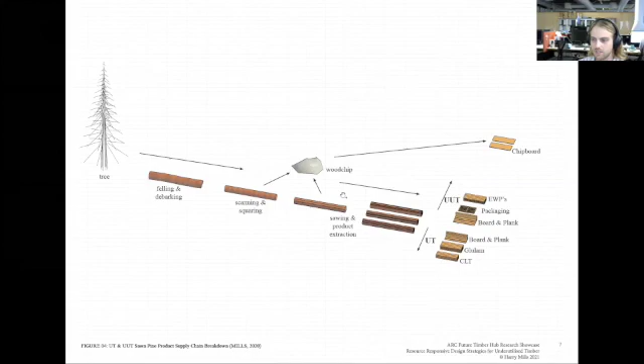This is another diagram of the different markets and streams to which the underutilised or utilised timber can go. The red is the utilised and the blue is the underutilised. These are areas of wood which I would classify as marginalised, or where there's opportunity for value adding, and it occurs right across the supply chain. For the purpose of this presentation, we're focusing on the board and plank products.

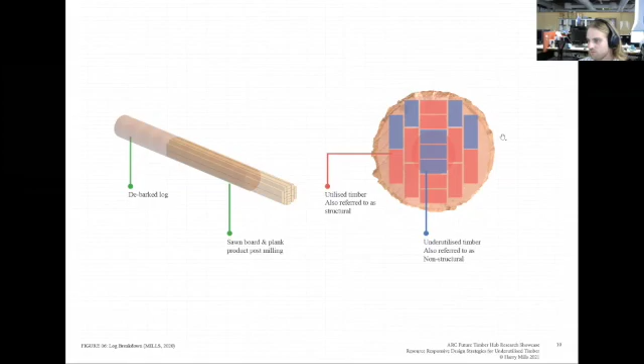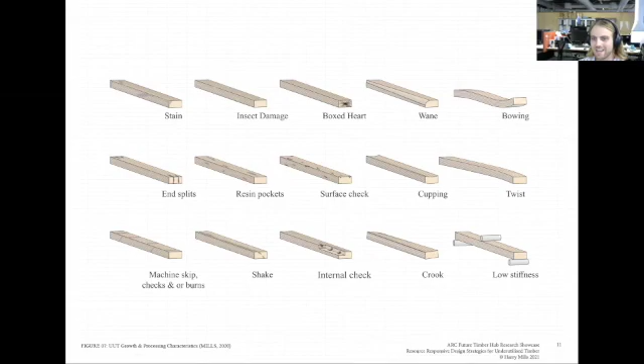Structural and visual characteristics like knots, wane, distortion, colouration, and low and fluctuating density properties are just a few that can be found in UUT, or underutilised timber. When these are found together, the timber is classed low in grade and has low consumer acceptance, which means it's low in value. Presently, we can define underutilised timber by its failing grade, low quality in terms of structural and visual characteristics, low in financial value, however high in volume.

Issues such as designer awareness, consumer acceptance, legislation and code compliance are challenges that must be addressed for UUT products or the UUT resource to gain market uptake. So who's responsible for dealing with this volume of wood? Underutilised wood is not a new concept. Indeed, low grade and low quality wood has been around since the earliest days of timber felling.

In the present market, it can be argued that the forestry, milling and manufacturing area is aware. However, outside of this area, among designers, builders or end users, there's very little awareness of this volume of resource. This research is coming from a designer background, aiming to initiate awareness, interest, and ultimately some responsibility with design practitioners.

I'll present now a preliminary responsive tool, which looks to address some of these aforementioned problems. This is a Rhino Grasshopper tool that consists of two components. This is a tool for post and beam building typologies, which has a structural analyzer for slab, beam and column design for CLT and glulam structures, and a resource consumption visualizer, which provides big picture understanding to how much wood is being consumed.

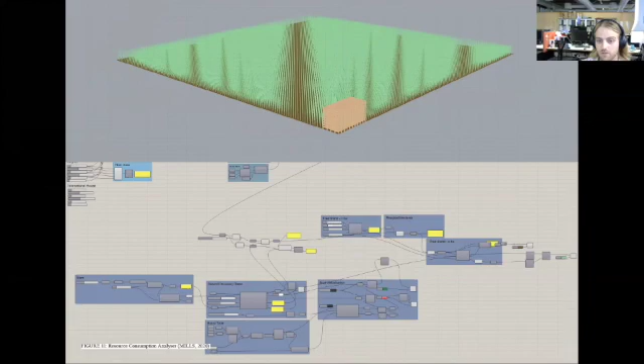I'll bring you back to the previous slides on underutilized timber to really pinpoint the problem here. For every log that gets sawn for board and plank product, up to 40% of it can be classified as underutilized timber. There's very little market for it. However, critically, there is a significant volume.

With little expansion of softwood plantations for some time, coupled with current demand for timber increasing for its sustainability credentials, the mass timber push, and a local market which is becoming more reliant on international supply for timber products, there are serious opportunities to value add underutilized timber for built environment purposes.

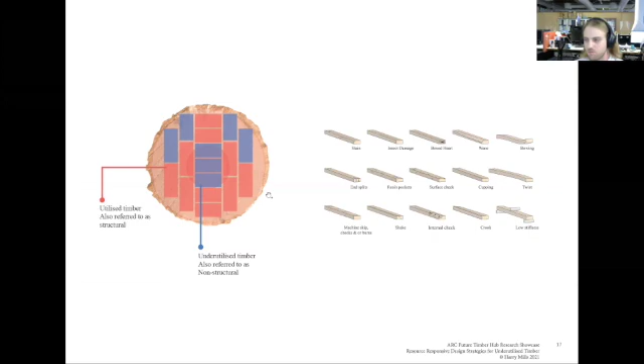I'll jump in and give you a fly through of the tool. So the design toolboxes are treated discretely. The slab design is based on a local manufacturer's guidebook as to current standards and sizes for typical slabs, and given for the proposed loads, serviceability, structural dynamics, and strength under vertical loads, and simplified natural frequency checks.

Beam design is similar to slab, sized for strength limit case, dead and live loads, and serviceability deflection limits. As with the beam, column design is sized for strength limit in case of dead and live loads, although omitting serviceability deflection limits given the actual deflection over multiple stories being minor. Some of the assumptions are neglecting transverse loads, non-critical, not significant to the total volume of building.

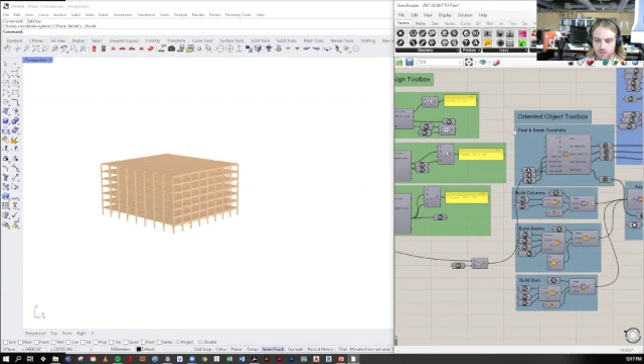We can play around with the sizes, the different span, beam length, and so forth. To verify this tool, we're really quite fortunate in that in Australia we have two recent building examples in International House and King Street that we could use to verify the accuracy of this, which was really quite successful.

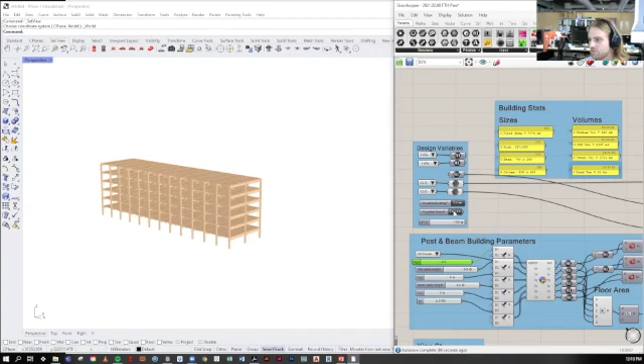Now, this tool gives you an overview of how much volume of wood and the sizes are being used. So if we look at International House with the material which was used, with no underutilized timber at all being used in the project. However, if we're able to implement and add underutilized timber to some engineered wood products through CLT or glulam, and if we're able to drop this to like a 40% uptake, we can drop 7 hectares of forest immediately.

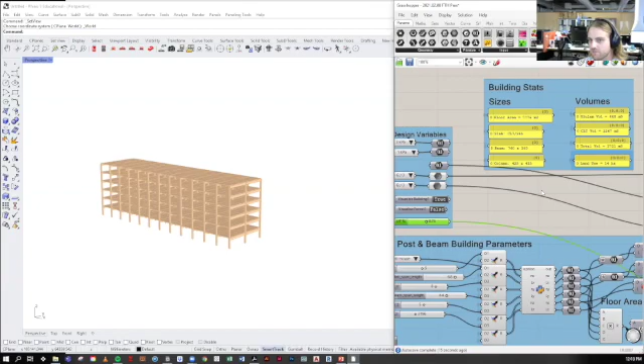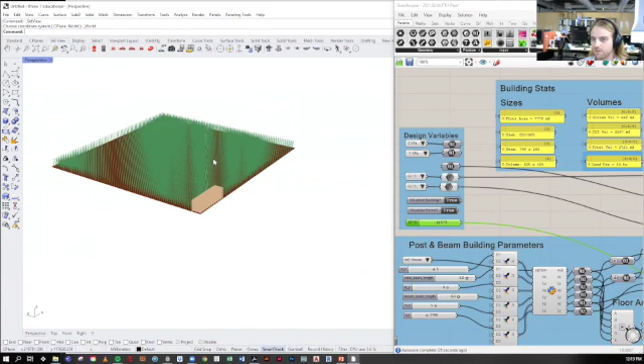And so just by implementing a little bit of underutilized timber or looking to specify this further, we can really understand how much volume of wood we can reduce. This we can visualize further with the forest and the trees. Now, this would be quite a handy tool when you're trying to convince clients to specify a certain product, and the benefits for that.

And the underutilized timber in terms of how much we can actually use, even just if we could get it to 20% uptake, we can really drop the amount of land use and how many trees we're ultimately using. So underutilized timber has the potential to be incorporated into different products, and providing designers with sustainable tools like this really gives options for them to specify alternative and more responsible timber products.

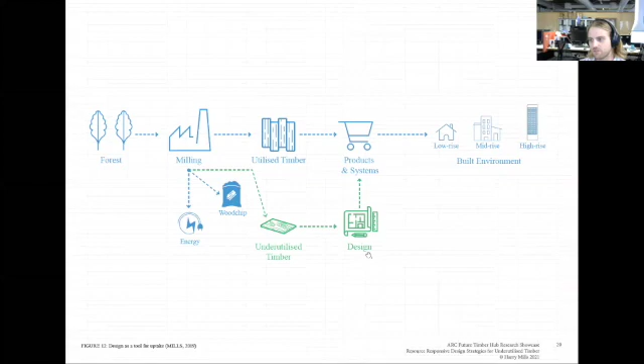This is where we're coming from as a design, trying to implement new products and systems, and ultimately trying to generate new products and build prototypes. Some of the other research that I've been involved in through the PhD has conducted interviews extensively across the building supply chain, and one of the key takeaways from that was that we need built prototypes to see what this resource would look like.

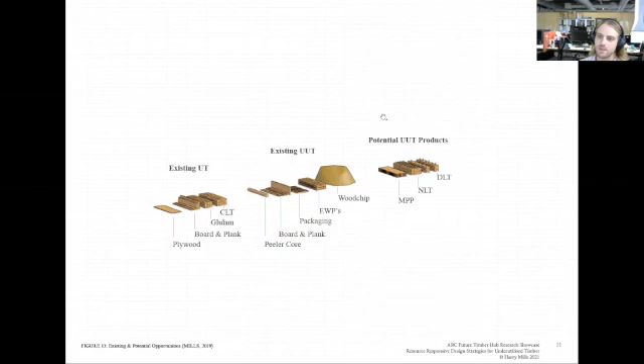Kim's going to give you a good overview of some of those products and systems, and I'm going to run through some of the tools and ideas that Joe's been generating for the project now.

So a utility grade processing toolbox has been developed to import and utilize quite a vast amount of data we get from the manufacturer, so board data designed for product and system design. Manufacturing board processing data is extremely rich, including board images, stiffness and grading, and defect type and location data. It is about 3.5 megabytes per board, with two boards produced per second.

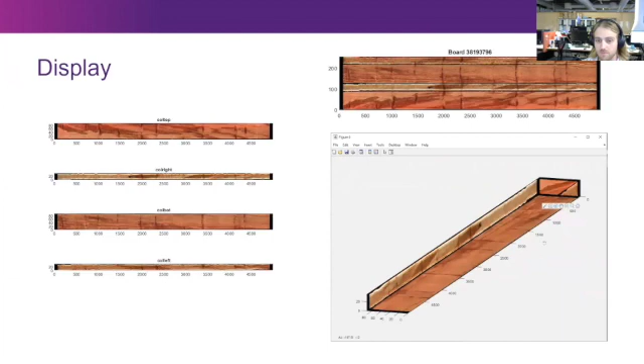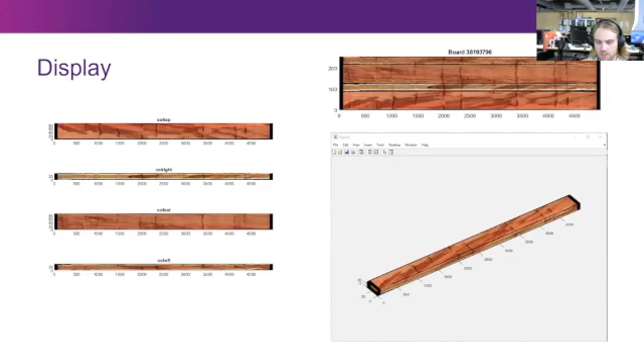We are the only building design research group in the world with direct access to commercial board and production data, which has allowed us to pursue some really interesting investigations, as you can see on screen here. But to enable that, Joe's been able to build a toolbox to import the XML manufactured data into a MATLAB resource database, which can store inventory information for any boards they're happy to use. We can inspect boards in full color to look for certain visual features.

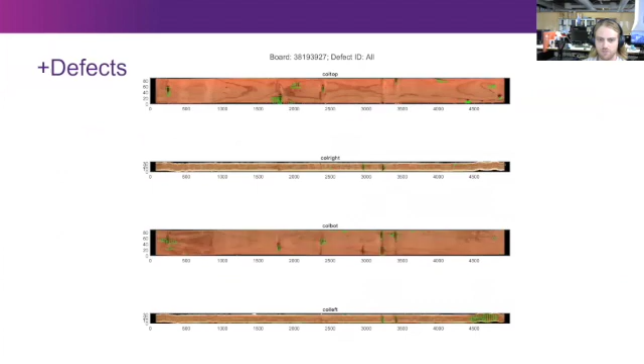The main features of interest are defects, so some of the characteristics which I was highlighting before of underutilized timber, and they're already located in the data packet that we receive from the manufacturer. So you're able to access the data directly, for example, to find clear wood regions or best face or best length, which contains the fewest defects of a particular type.

Our primary interest, though, is the stiffness data, which is stored as an overall board average modulus of elasticity, or MOE, but also as continuous MOE values sampled along most of the board length in the mechanical grading process. This data is what Joe's been accessing for the structural product and system investigations, and this will be further elaborated on by Kim with some of the examples he's going to show.

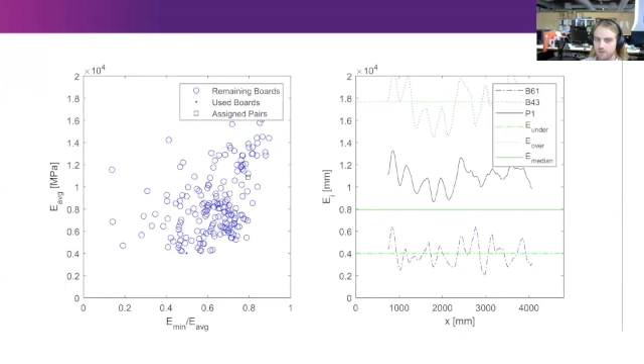What we've found is that for board laminations, quad lamination is sufficient to completely homogenize a set of underutilized timber boards, effectively raising the average MOE to 8,000 MPa for the entire feedstock, as well as substantially eliminating localized weak regions of the board.

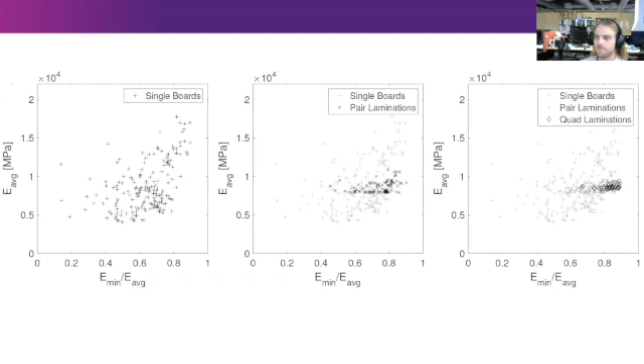One of the last things I'll present for Joe is a work in progress. It's an extension and a bit more beefed up version of the tool that I presented earlier. Joe's looking to integrate some of the tools and concepts of that earlier one for real-time connection design tools, essentially developing a Python library of parametric models for element and connection sizing, as well as design heuristic tools for direct section lookup. They are open source and are intended to both help with initial concept sizing, as well as provide some building blocks towards complete algorithmic part generation for digital fabrication.

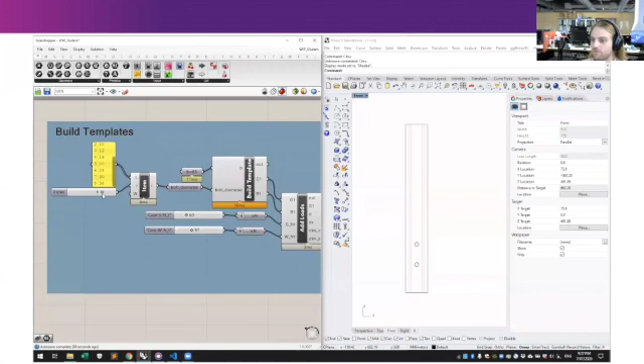This is a bit of a work in progress, as I mentioned, but as a brief, simple illustration of what we're driving towards, here is a glulam member with two tensile load cases, element cross section and connection sizing, generated in real time based on governing load and preferred connection bolt size. The colored outlines are the load case sizes; the black outline is the overall size from the available section sizes.

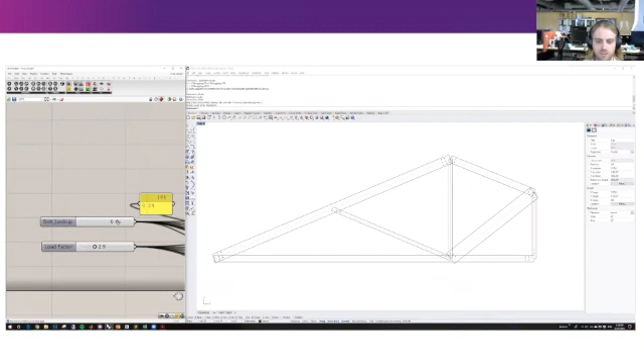Here is a mock-up of the end goal, but these tools are fast enough that we can create structures in which every element and connection are self-sizing in real time. This truss has 7 elements and corresponding connections. And as we apply a load factor to scale the element loads, or as we change the bolt size preference, you can see the truss attempting to size itself or remove elements when there are no sizes available for the given load.

So on that note, I think that's a good overview of some of the digital strategies that Joe's been working on, and a good understanding of the underutilized timber, or out of grade non-structural wood, which we have available to us here. So I'm going to hand over to Kim, who is in the architectural collab, and he's going to run you through some of the work he's been up to.

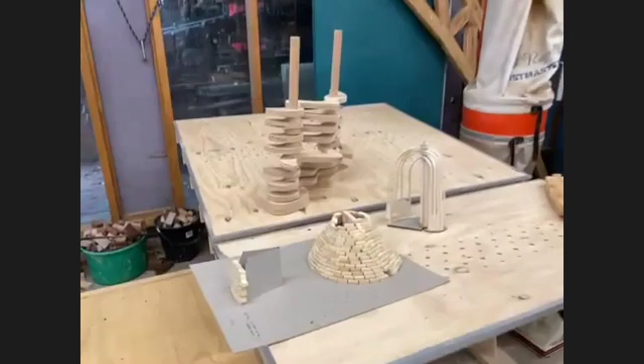This space is what we call the collaborative laboratory, or the collab for short. And it really is a space where our students in the School of Architecture, but also between the School of Architecture and the School of Civil Engineering, can collaborate on projects. So the types of things that they might make in here would be little models, as you see in every architecture school, but then they also get to build full-scale prototypes.

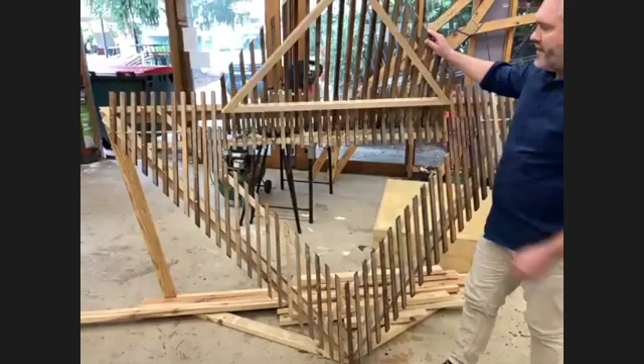So this is a recent project where some students in the master's course were looking at building a screen for a tower with a little operable window. So they learn how to actually fabricate these at 1:1 and develop their design accordingly. So we really see a strength to our teaching here, being able to offer students the opportunity to get involved in hands-on making, and that leads them into potential research higher degrees.

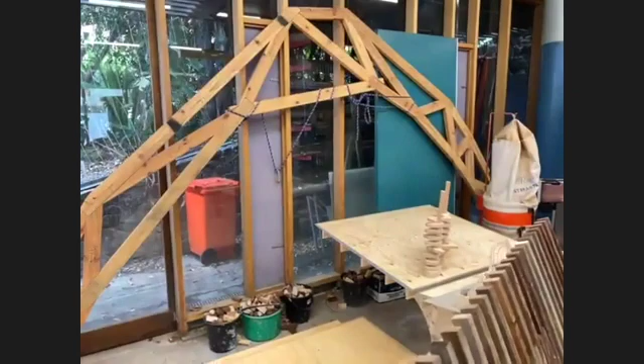What I'm going to talk about today, you'll see this kind of weird shaped truss behind me here. This is one of the first of what we call inventory constrained design projects that we worked on about 2 years ago. It's quite a funny shaped truss, but it's deliberately so. And I'll explain that when we get to it.

One of the key things that we're looking at when we look at underutilized timber is what you might be able to do with the timber if you were to take out those defects. So if we were to start off with a piece of utility grade stud and we cut the defects out, of course you end up with all of these odd shaped pieces, and that's really not of much value to people.

However, with our computational design processes and our analysis tools that we're using in MATLAB, we are able to automate the design of custom shaped structural members and structural elements such as this truss, which look to find a home for each short length of timber that results from a piece of utility grade once you cut the defects out.

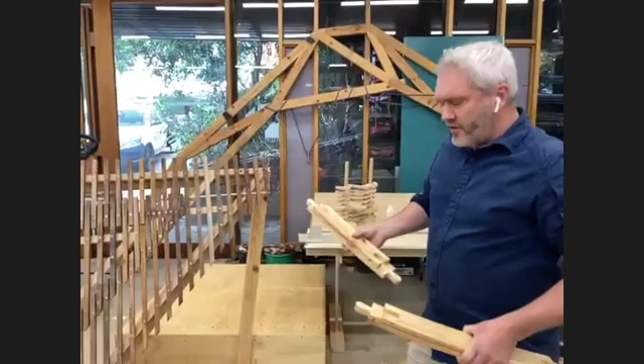So one of the things that we look at is what you do with small pieces of timber. You can make specific shapes. You can look at how we might be able to join these pieces together without the need for a mechanical fixing potentially. We can do that through our computational design and our digital fabrication.

So to summarize it, we're interested in what we can do with undervalued timber that comes from a shortening of a member into small pieces that are dimensionally undervalued. We're also interested in manufacturing byproducts such as peeler core. I'll talk about this in my presentation as well, but we have quite an extensive range of projects where we look at ways in which we can use short length peeler core and join it in novel ways.

We are also interested in offcuts from, say, a CLT manufacturing process. So here we have a column which is laminated circumferentially, and it's made out of what we would envisage being an offcut from a billet in a CLT manufacturing process.

We're able to use the technology from both the computational design tools and also our digital fabrication to look at how we can yield greater value out of using what would otherwise be seen as pieces of resource that have very little value.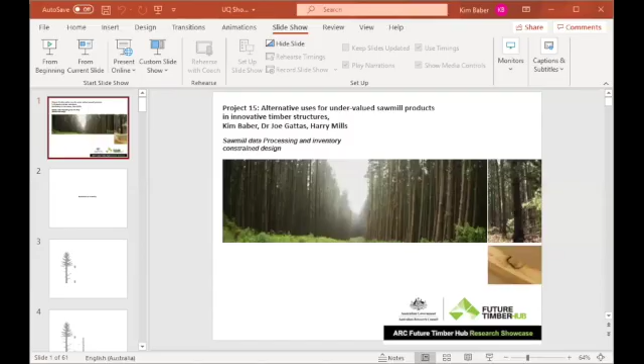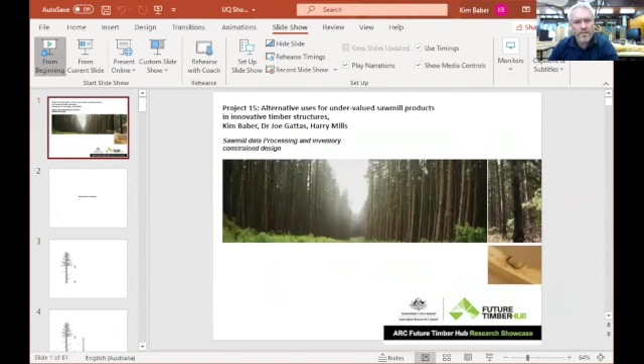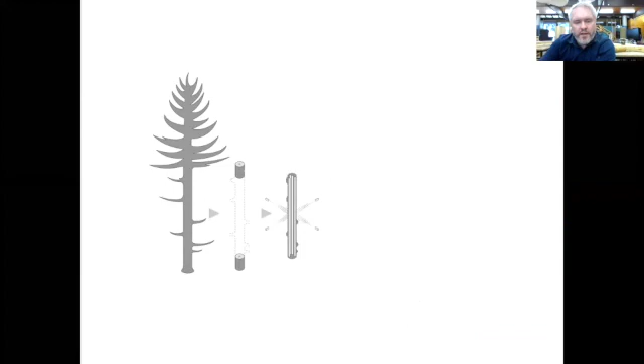So as Harry introduced, one of the core parts of this project is to look at how we can both generate an inventory of undervalued timber and then what we can do with that inventory. So if we just re-summarize Harry's slide on what happens to the timber from the stem, obviously after milling we have usable boards which would be clear and reach the required MOE over their length. But those that have defects on the bottom there are often used for other applications, and in some cases that turns into chip.

However, what we're interested in is what we might be able to do if we were to work with these short lengths. And so once you do cut those defects out, we have, in effect, an inventory of unique lengths of structural grade timber.

So we do have all of this data at hand, as Harry described, and we're able to analyze that in a very fast and sophisticated manner that will generate this digital inventory of short lengths. On the right-hand side, you can see here what we might yield from a typical pack of utility grade timber in terms of the usable lengths that would actually achieve the required structural MOE once you cut out the defective lengths from the stud.

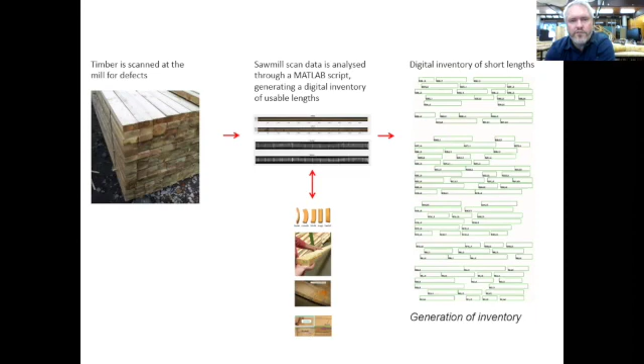So as you can see in this example right behind me here, one of the first projects that we looked at, we're looking for structural applications where you are already working with short lengths of material. So trusses are a good example, and curved trusses even more so, where by definition, every element within that structure is already being cut to a shorter size than it's likely arriving in the workshop as. So here's an example of a curved truss where we looked at our inventory.

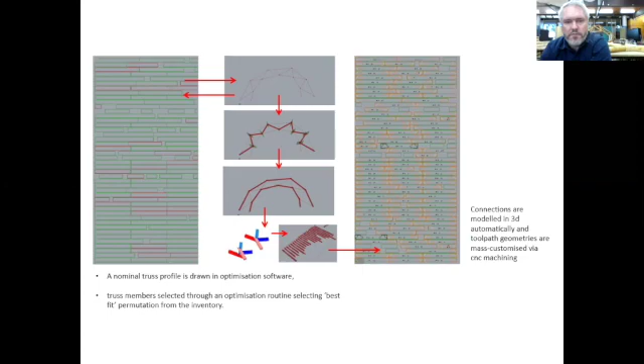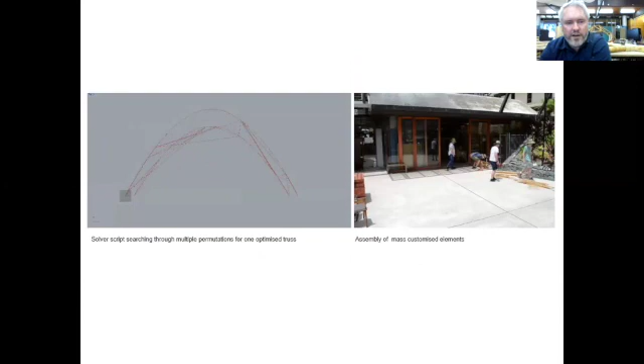We use what we call a parts assignment heuristic tool, which takes all of the parts available in the inventory and it assigns them to a location in the structure based on a set of rules that we can make up, a heuristic that allows us to program in desirable deviations from the target geometry or certain lengths. Here you can see it running on the left-hand side. It's rapidly sorting through all of the combinations that might be available.

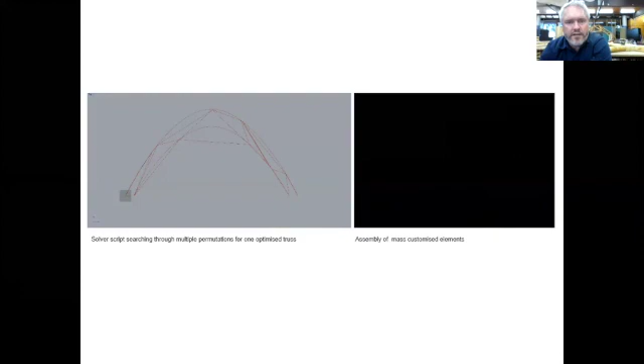And so this was a project that we ran 2 years ago where we looked at developing a uniquely shaped truss, but again, each element within that truss is machined digitally through our CNC router, and we're able to convert the process of inventory constrained design into digital fabrication.

Another example which took that process and really applied it at a more sophisticated computational level was a project that we entered into the IASS, the International Association of Shell and Spatial Structures, as part of a competition where we worked with Professor Jane Burry and Chun-Wei Chen from the Swinburne University of Technology. And this project was looking at curved arches. So again, a structural type that inherently requires small lengths in order to be constructed.

So we were combining two form finding methods. We were actually looking at a funicular structure, and some of you may be aware of the funicular geometry that Antoni Gaudí worked with in masonry over 100 years ago. This project was looking at how we might look at a combined optimization tool where we used both a funicular modeling tool combined with an inventory constrained computational model.

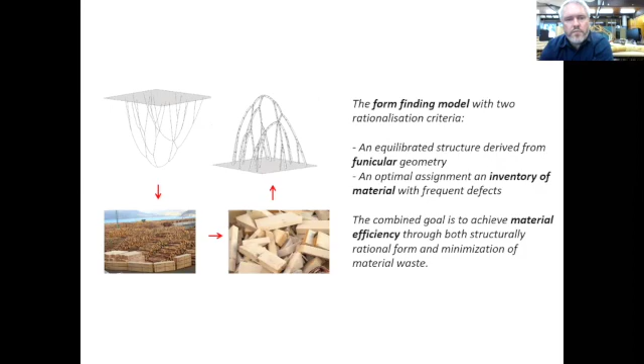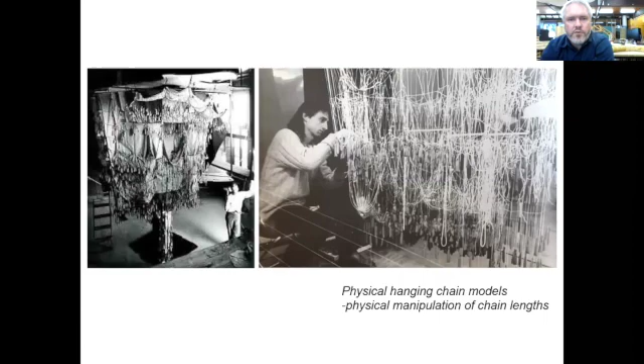Here's the types of models that Gaudí worked with over 100 years ago. And in these models, he actually physically suspended lengths of string and chain in order to derive the optimal structural geometry for, in this case, a masonry arch. So as I said before, when we build the parts assignment heuristic, we feed in constraints, which in effect constrain which parts of the inventory we're able to utilize in the structure.

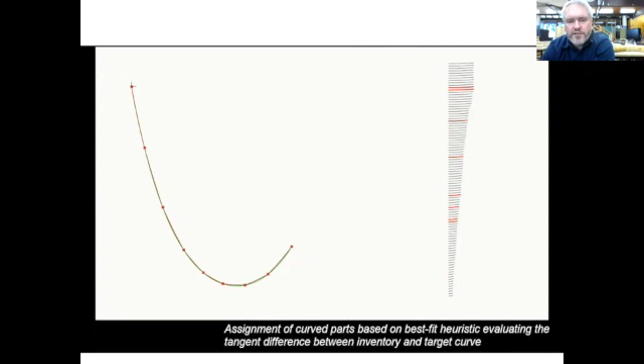So in this case here, we have a given form, a given curvature, and we are able to apply, for example, the amount of curvature that a certain given length of timber may yield once we define the amount of material taken out of it. So here you can see a little video showing when we change the curvature in a given arch. On the right-hand side, you can see our inventory of unique lengths, and it goes through and sorts out in real time which parts would be assigned to that arch and in which order. And so that's quite a sophisticated, what we call a parts assignment tool.

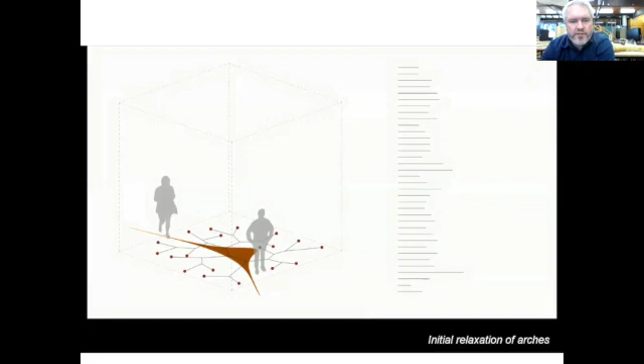And we've run this in combination with a digital funicular form finding tool. And so this is using Grasshopper in combination with a plugin called Kangaroo that allows us to hang chains in a virtual environment. It also allows us to, in effect, tweak the lengths of those chains or strings, like you can see on the right, in a way that's actually a virtual version of Gaudí's hanging chain model.

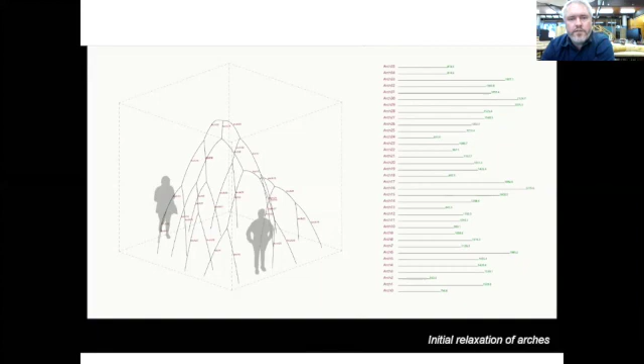So we're able to have both a form finding model that has its own optimization set of rules, which is about funicular geometry. And we combine that with the inventory constraint from our inventory of short lengths. So here you can see after we've generated that initial hanging chain, we can then run our parts assignment heuristic to map onto that geometry where each part of our inventory can best fit. However, we can give it a certain amount of tolerance, and we can say, okay, let's try to get every part within 5% or 7% of its target geometry.

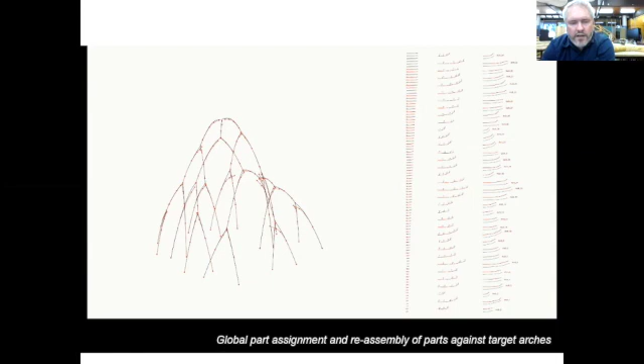And it tells us how close we can get after sifting through thousands of variants. But the kind of neat thing with this project was that once we'd arrived at that, let's call it a best fit, it's not necessarily the perfect fit, but it would be the best fit with that given inventory. We can then go back to our funicular form finding process, and we actually relax that model in order to meet the target that has been given to us by our inventory.

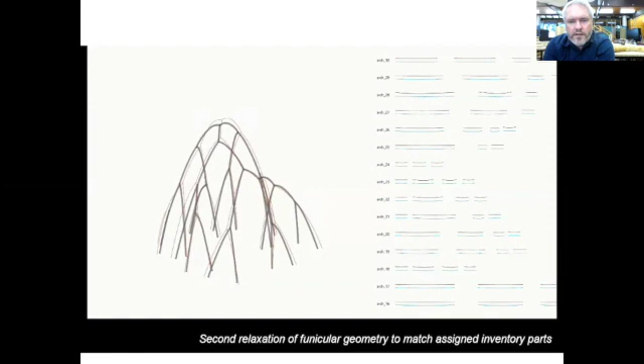So in effect, it's telling us how much to shorten those little pieces of string in the model and therefore meet the constraints of the inventory. But at the same time, during the re-relaxation of that model, it's also deriving a new, slightly different funicular geometry. So we're able to optimize both the funicular geometry as well as the parts assignment of the unique inventory of short lengths of timber.

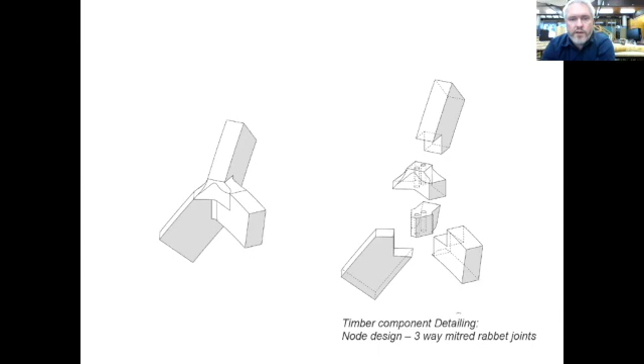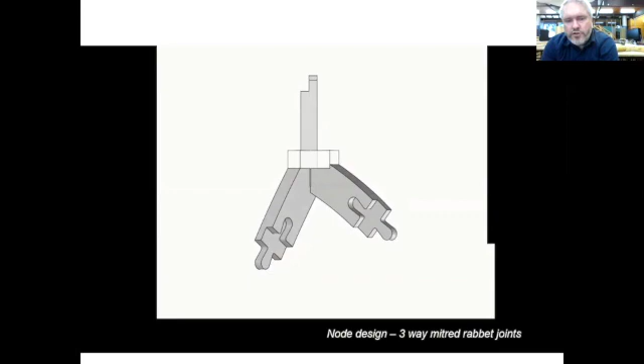Now, our challenge was also to use utility grade for the structure in its entirety. Now, this structure was very interesting in the sense that it did involve these three-way joints, these branch joints. And by definition, each one of these joints was unique in the way in which each member intersected each other in a three-way geometry. So one of our challenges was to look at how we might be able to construct this complicated three-way node out of simply two pieces of, in this case, 90 by 45 utility grade stud.

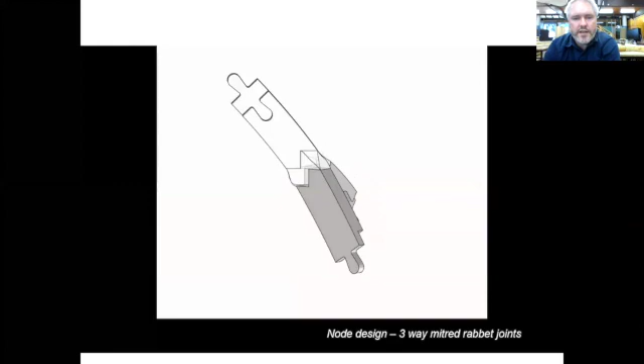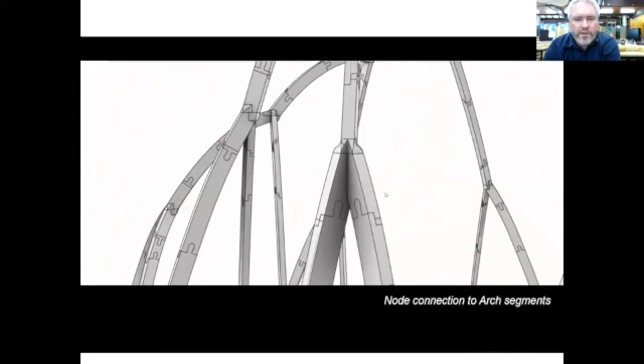And so you can see here that it's actually made out of just two blocks, which are paired top to bottom. And we create this filleting between the pieces that allows us to transition from one geometry to the next. So again, you can see that this computational processing of the transition of each joint could be done through a parametric model. And obviously, each one of these is unique, as you can see. It finds the intersection paths of each of those pieces of timber and generates the geometry of each one of those blocks uniquely.

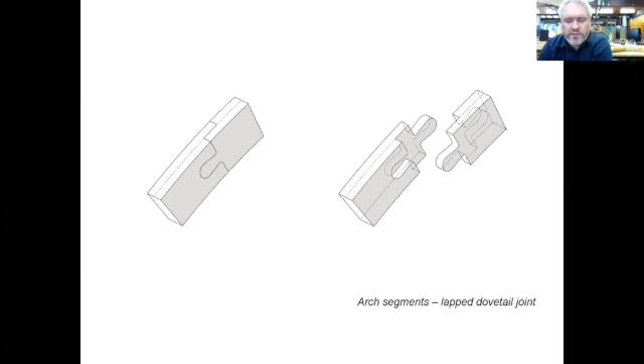A simple lapped dovetail joint was what we used to join each one of the members inside the arch itself. And again, if you think about structures that are necessarily using lots of small pieces, what we want to avoid is lots of mechanical fixings, lots of fixings that involve screwing or bolting, for instance. The other constraint, which was part of the competition brief, was that this pavilion that we designed needed to be packed up into suitcases and disassembled. So it had to be completely deployable in its context.

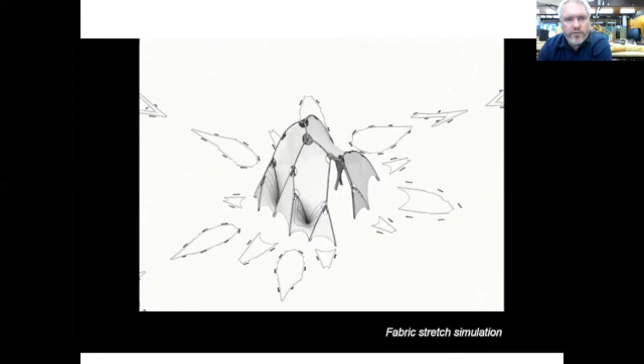So the structure that we entered in this competition was for a 4 by 4 meter pavilion, and we stretched a fabric over the outside of that timber frame as part of the exhibition that was part of the conference in 2019. So each one of these panels was parametrically defined and sewn and stitched over the top of the outside arches, and there's a little seam that you can see that gets entered into a groove in the timber.

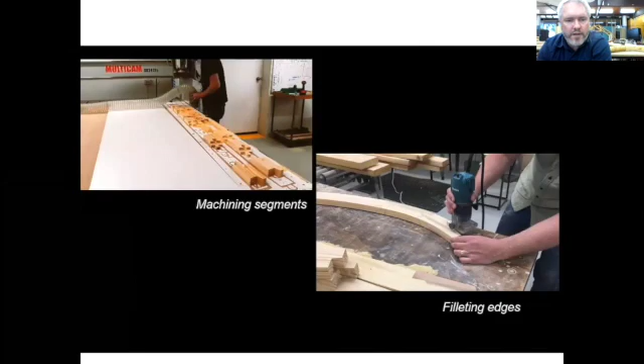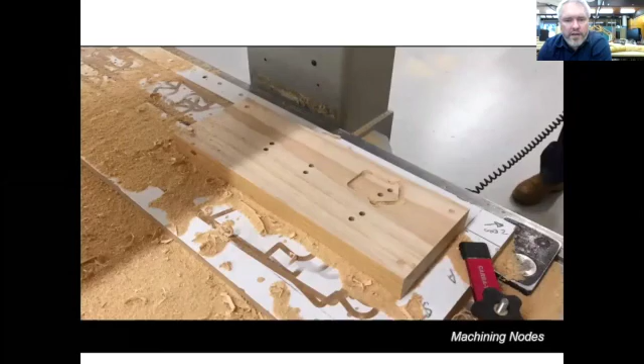So we made this in the workshop here, and you can see, for instance, our CNC router machining each one of the components in the arch. And we did some hand finishing, but largely this was done by CNC routing. And here's a pair of these nodes, 2 pairs in fact, and you can see how they were machined. The machining was only from the top down because we had a 3-axis CNC router. That's all we had available for the project. But the idea of these is that they are machined from one side only, then flipped and connected back to back. And here you can see the way in which these nodes connect.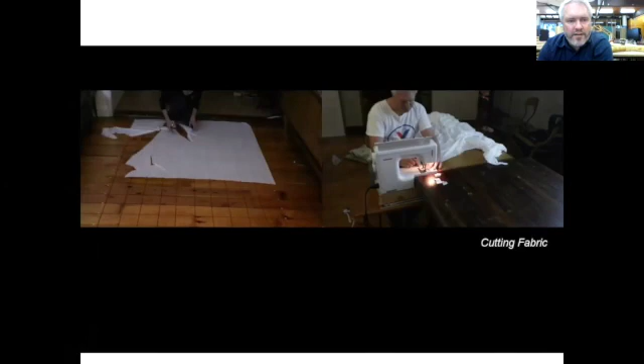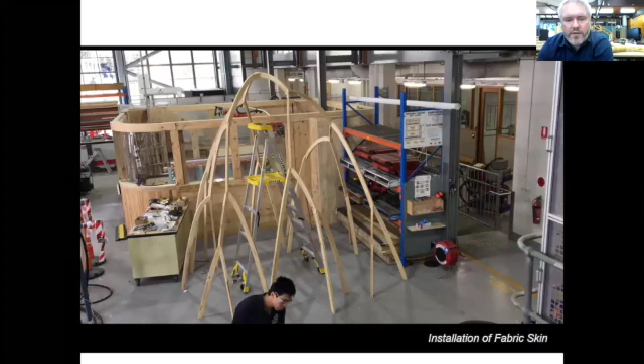Here you can see it being erected in the AEB structures lab. And as I said, the whole structure was designed to be deployable. Now, what's interesting, I guess, about this process is that really this pavilion is the demonstration of a process. It's the demonstration of an analysis process that we have developed in analyzing the inventory, but it's also a demonstration of how that process can be then turned into a 3-dimensional structure.

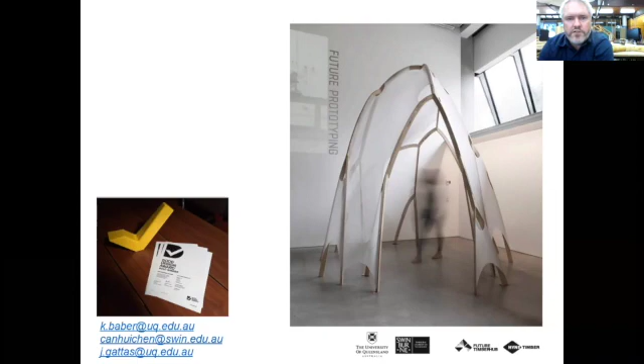And using a mass customization digital fabrication technique, we can use the processing power of the computational design tool in combination with a digital manufacturing. So this pavilion has toured a couple of places. It was at the University of Melbourne as part of Australia Design Week in 2020, just before COVID hit. And it was awarded a Good Design Gold Medal in the end of last year. So we're quite proud that it's being able to demonstrate some of the research that the hub is doing.

Now, I'm going to move on to a slightly larger prototype. And in this case, it's looking at how those types of computational design processes could be changed in scale. So here is a node that we are looking at building up out of a series of small pieces, again, small blocks yielded from utility grade timber. In this case, a combination of 90 by 45, 70 by 45, 100 by 25 inch board. And it was really, I guess, part of it was inspired by the types of sophistication that came out of making that node for the previous project.

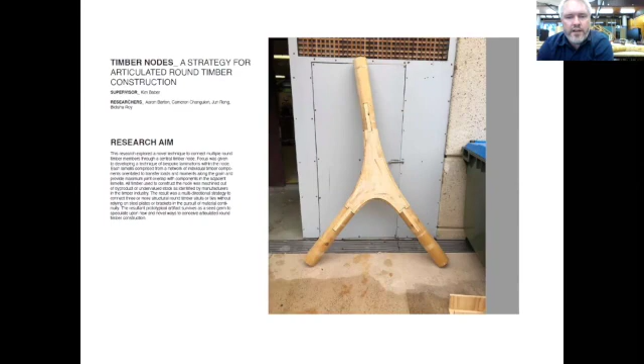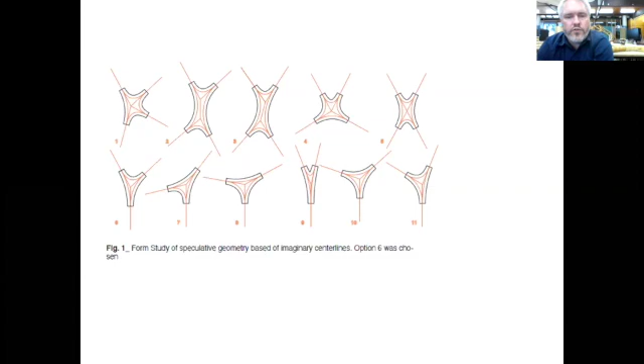If you were to imagine that we build a space frame structure out of peeler core, where the nodes, where the peeler core connect, could in fact be mass customized, what we were looking at is a way in which we could laminate in a block gluing method specific layups of lamellas that allowed us to overlap in both directions, unique combinations of small blocks.

Here you can see that the node that accepts 3 peeler cores is made up of 5 lamellas in a combination of 90 by 45 and 100 by 25. And there's a study on the top left of the cross section through those, where we're looking to achieve as much overlap in the gluing of those lamellas. And on the right hand side, you can see the varying makeups of how they're glued side by side. On the bottom of that image on the left, you can see ideas for the tenon joint that we're looking to design into this peeler core.

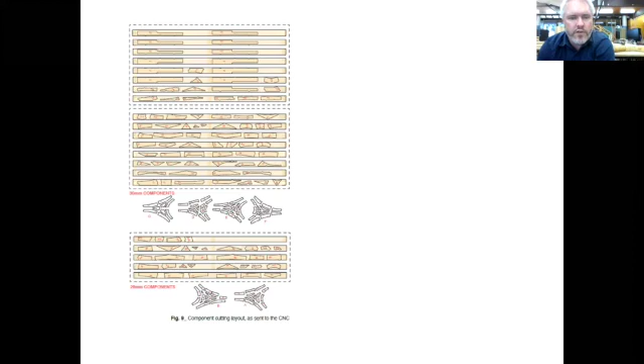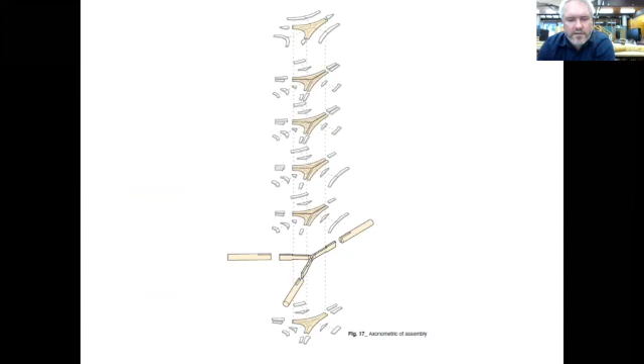And here's the cutting pattern. So again, this is a process that we could automate through our inventory parts assignment model, where if we know exactly where those short lengths exist, we can cut them from those pieces of utility grade directly. And here's an exploded axonometric of how all of these parts go together. You can see the top stacking of the lamellas, and you can see the tenons that we are inserting into the end of the peeler cores. And here you can see it being fabricated.

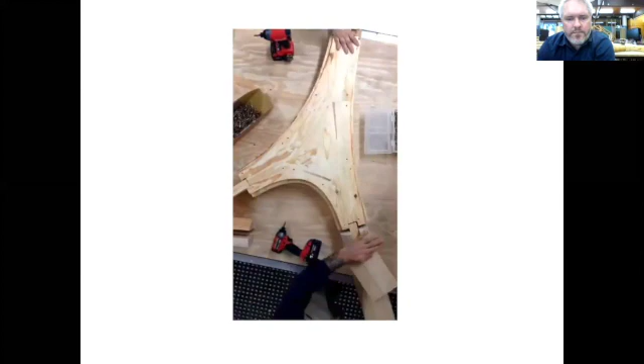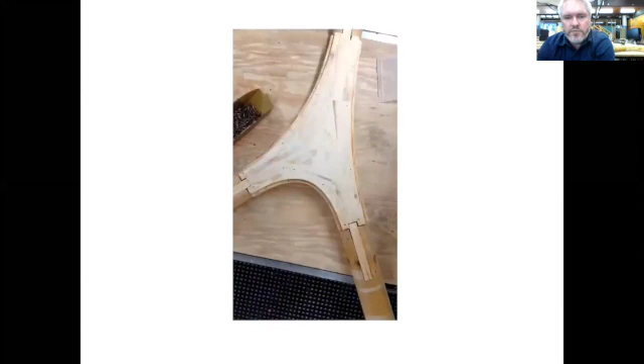So what we're interested in is how the sophistication of the modeling of this node interacts with the sophistication of the parts assignment from our inventory. And it allows us to build bespoke structures, in this case with a node that has a huge amount of, I guess, smart geometry built into it. But what we're looking at doing is just actually having a fairly simple mortise and tenon joint that allows us to insert those peeler cores in a direction that's perpendicular to the tenon rather than parallel to it, so that we could imagine structures like this. Here are some examples that I'm showing.

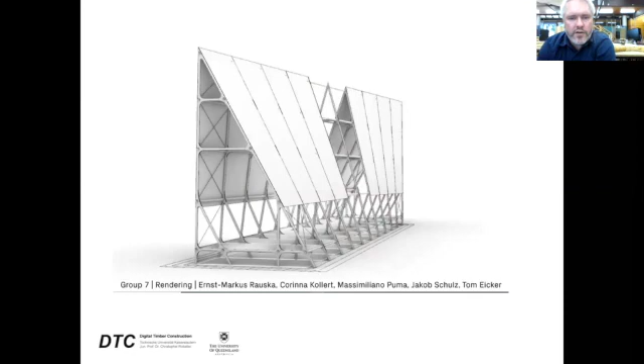We have done some collaborative work with the Digital Timber Construction Lab at the Technical University of Kaiserslautern in Germany with Junior Professor Christopher Robeller, and we were due to have him come out with a group of students last year, but that got cancelled due to COVID. But these are the types of structures that we were looking at constructing a full-scale prototype from out at our Pinjarra Hills facility. So you can see here that the scope of how this type of node could apply itself to a whole range of different structural types has an almost kind of limitless potential.

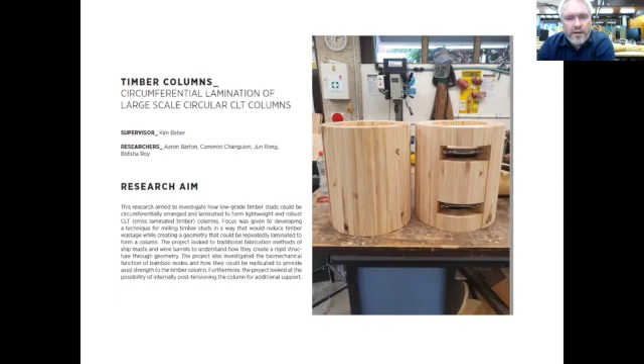Now, the last one that I want to finish on is this circumferential lamination. So again, looking at how we can use dimensionally undervalued sections that might either be thin, say inch board, or might be offcuts, say offcuts of CLT. And we're looking at laminating those into a circular column. This is not something that's new. It's how they used to make timber masts for a very long time. But I guess the proposition here is that we're looking at making hollow columns for yielding the benefit of putting that material in the outer wall of the structure.

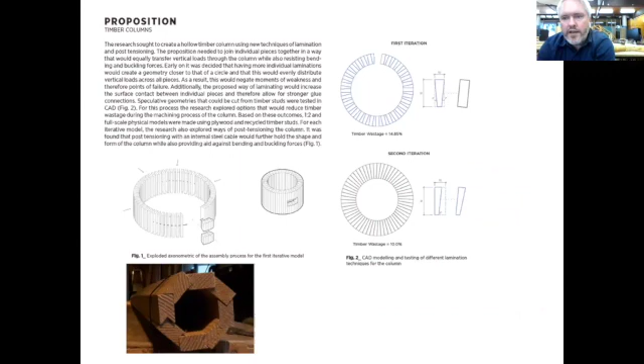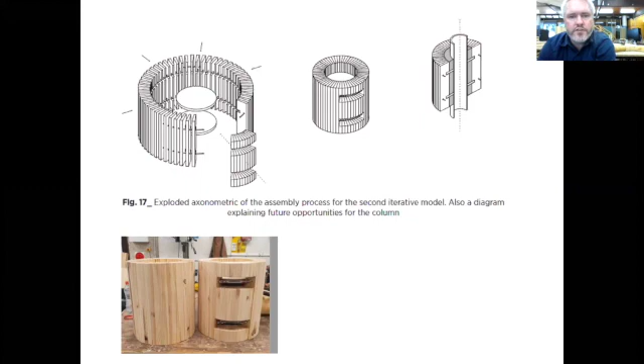So some test prototypes that we constructed were just simply looking at how we might use thin boards cut to a wedge. And in these cases, we were looking at a circumferential tendon that can wrap through those in the form of a hoop, both as a form of confinement reinforcing, but also as a fabrication strategy for how we can actually manufacture these elements.

So some of the small scale prototypes that we looked at were literally a 1:2 scale model where we were cutting thin boards to a wedge profile, which would involve, say, a single rip through a member and then opposing its direction. But more recently, we've looked at what this would mean if you were to use offcuts of CLT.

And so our latest project that we just started doing some testing on not even 2 weeks ago was the lamination of CLT wedges, which we imagine could be offcuts, but the way that we made it, we just simply saw through a billet lengthways with an angle on the saw, and then you just simply flip those pieces back to back.

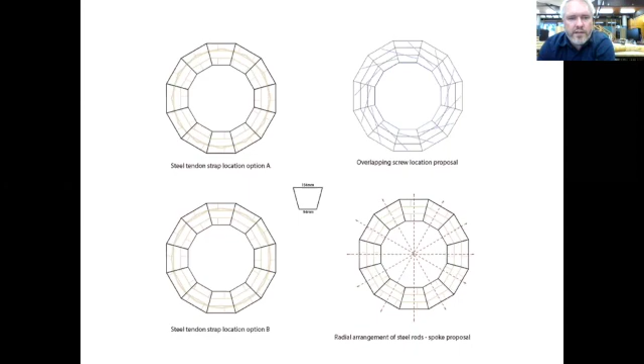What we did is we used a series of cores or nodes, should I call them, like stiffening plates that were made up in this case of 3 layers of 17mm ply, but that could also be a CLT plate. This column, for the purposes of testing, was 1.9 meters high, 580mm diameter, with 6 of those nodes at 400mm spacings.

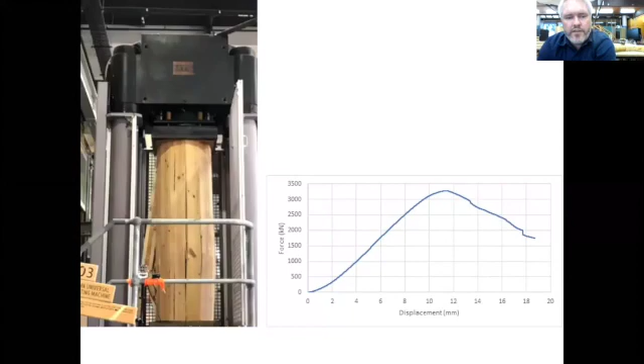And we did test this almost 2 weeks ago, and we managed to achieve a capacity of 3.2 meganewtons for that column; the sample was 1.9 high, and it's about 580mm diameter. So I'm told that should be able to support a 6 to 8 story commercial building on a regular commercial office grid. So that one is relying on glue only, but as I say, we are looking at other methods for hoop confinement in the way of a concealed steel tendon.

So key outcomes and future opportunities for this research. We've really been developing analysis tools as well as modeling tools, and the analysis tools translate the sawmill scan data into a format that is readable in our design modeling software. So that's a key development of our research. And obviously we're using that in design modeling tools. And we're really looking at rationalizing material usage through these novel structural geometries.

And I guess that's where, as an architect, what I bring to the project is thinking about different possibilities for those novel geometries and how they might offer different spatial opportunities. And really challenging the norms of what we might typically use in construction applications. We're also developing processes for increasing the yield of structural timber from underutilized resources, and also how we might generate structural products from offcuts from manufacturing byproducts.

So future opportunities: as I said, these are a set of processes that we've developed. And the examples that I've shown you are either prototypes at 1:1 or small scale pavilions that demonstrate how these processes can change our understanding and appreciation of the resource that's available and how we can translate that into novel structures. But they certainly are scalable, and that's what we're interested in.